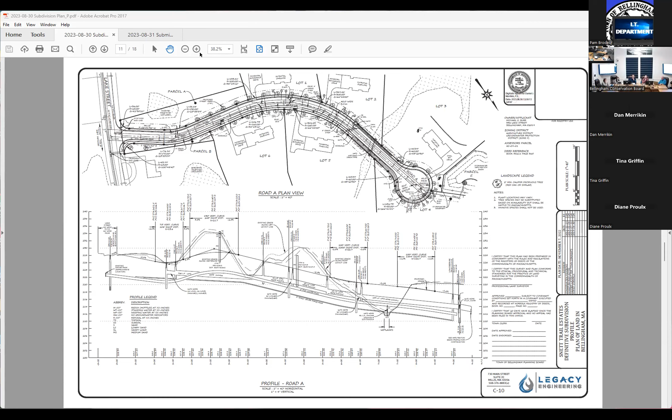The commission asked that at the crossing, we replace the two 18-inch pipes that we have with a single 24-inch pipe, and we have done that here. What you're seeing is the inlet elevation and the outlet elevation, but it is one single 24-inch pipe in that profile cross section there.

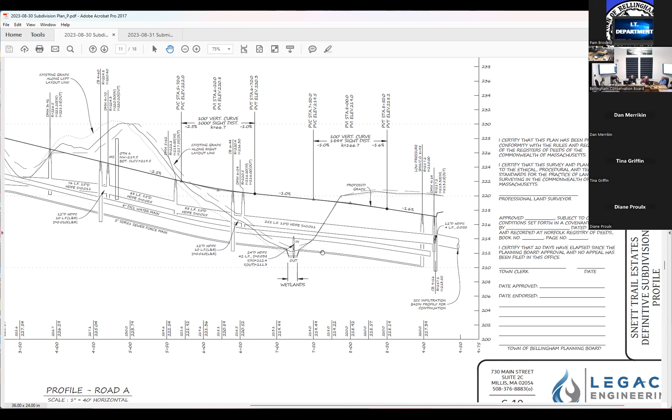The second change that was made is we had asked the planning board if they would consider waiving the requirement for a sidewalk, and they said no. So, within the road footprint that we already had, we have added a sidewalk, and it's on the bottom side of the plan that you see here.

No. Length of the road? Is it white concrete, or is it going to be asphalt? It's asphalt paved. And those are the only two plan changes.

BSC review, and I know Matt's here, but we did do a site walk. We went out and looked at the crossing, and the plans really haven't changed with respect to the proposed replication area, and I know you have a memo. Give the members a chance to review some of this information - some we've gotten on the web page that Hannah set up for us is really new, and some is a little older.

Just want to make sure everybody has had a chance to review Matt's brief, to the point summary. Are these drawings the ones I have? No, I don't think I have these revised ones. Dan, did you provide these already electronically?

Okay, I'm going to check. Was that recently submitted? I submitted these three weeks ago. The review is the last document. I can tell you when - yeah, three weeks ago, I should have them.

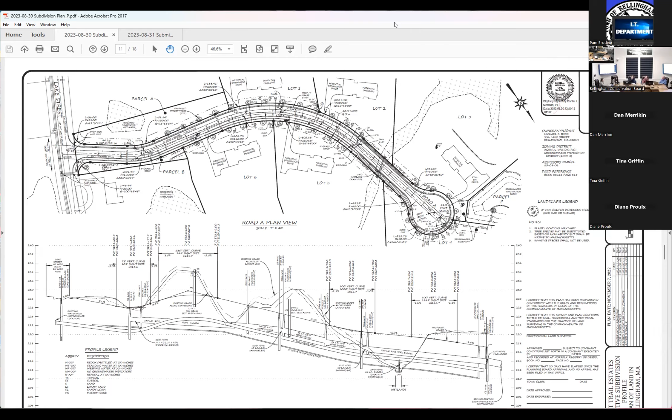All right, well, if no one has any additional questions, I think we can move to accept a motion to close the hearing and issue - do we have any other conditions? Do we have an order of conditions already back for this? I don't think anyone's prepared an order for this. I thought we had talked about doing one, but maybe I'm thinking of another project. There were multiple orders of conditions that were in different steps.

So we'll need to accept a motion to close the hearing and issue an order of conditions with acceptance of the project for 0 Railroad Street to Snett Trail. So moved. Second. Thank you, Steve, Danielle. All right, any other discussion?

Anna, just because I'm coming in at the end of this project, is there any special things you would want in the special order of conditions?

Well, given you're working with the stream bed, what do you think? Is there anything we've said in the past? It's been a while since somebody did something with a culvert in a stream bed, but obviously we're going to want to see sediment erosion control. Notify us when it's installed so we can inspect it prior to commencement of construction in that area.

It's such a low flow area. The last time we walked it, unless it suddenly flooded with all this rain and got a lot higher. The only other thing is when doing road work over an area like that, sometimes they have to do dewatering when putting in the base and digging out the bottom. They shouldn't have to encounter any of that, there's no groundwater. I'm just thinking of keeping the sediment from going downstream. There's almost no stream, plus the erosion control probably handles it.

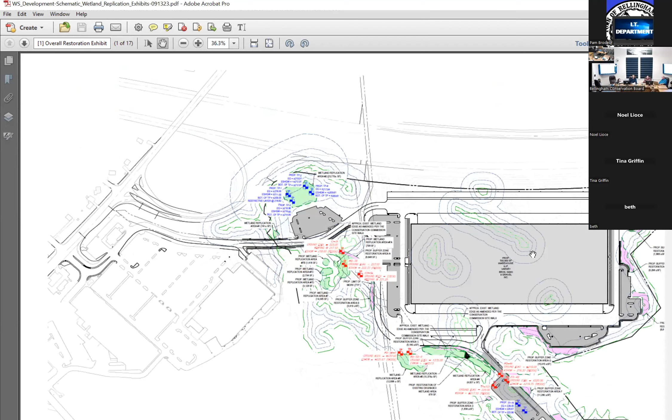All right, so this plan here - just an overview, though I have detailed views - the areas highlighted in bright green represent the areas we're proposing for direct mitigation of wetlands, so those are areas that will become wetland. The areas in pink represent the current buffer restoration program. Now, some of these areas, if you go into the Wayback Machine, we had discussed some sidewalks that may not, in the commission's view, be best for that buffer mitigation. So this isn't reflective of any changes we made.

The first thing we wanted to do, working with Matt and the commission, is get some level of concurrence that the general locations and shapes of the wetland mitigation made sense. Those are going to be informative to how some of that buffer restoration might work too. So we haven't tinkered too much yet with the buffer stuff - that's going to come next, but it's going to be heavily influenced by how the mitigation comes together. So we thought that made the first next step.

Generally speaking, in the upper left corner you'll see that green polygon with the 4 blue dots on it - those are test pits that we completed in the field. That was the area we saw on one of our site walks that looked, the soils were kind of gleyed, they were a little bit gray, and it looked like it had some seasonal hydrology. When we did some hand augering, we noticed there was a restrictive layer that may have been 15 or 18 inches down. The test pits we did out there confirmed that around that boundary, there was a restrictive layer.

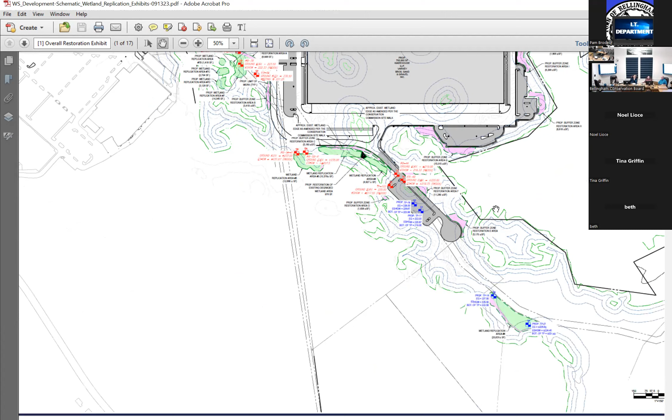Is it laggy? It was a little bit, it looks like it might be frozen. There it goes. Okay, little suspense there.

So this area, what we tried to do is outline it for two things. One, the area that we found to be restrictive. Two, in the areas you can kind of see the contours, these bunched up contours here are those ridges and rock piles that are kind of artificially there.

So the idea is remove those rock piles, level that area out, and kind of place that in elevation. We're gonna work with Matt, Brian, to create topography in there, use that restrictive layer, and then use some of the engineered materials that we're gonna introduce to make it a wetland. We really feel good about its potential to be a functioning wetland system.

Some of the hydrology will be influenced by the stormwater systems that we have that are contributing here, that are really designed to kind of mimic how the hydrology has been functioning in this area as well. So in terms of its sustainability, we feel pretty good about it.

That's the one area that's fairly new. We had talked about it at a high level maybe a month or so ago. The next step for us, provided the commission felt it appropriate to advance into what we're calling more of a schematic design for this...

...and have Matt continue to oversee that, would be to grade this out and really put some engineering, or some more engineering, behind it, so that Matt can really kind of get into the mechanics of it and start exploring how we want to construct that.

What happens if that doesn't work? Good question, I think we can talk about some contingencies. Maybe it'd be better if we build it out a little bit and then circle back to that. And define 'doesn't work' - by doesn't hold water, yeah.

So one of our targets here is to create vernal pool habitat, so that's a very identifiable target. With the perched groundwater wetland system replication area, you can spec out more facultative species that occur in wetlands primarily, but also can survive drier type conditions. We're gonna dial that in a little bit more and give more specifics. But I'm confident we can create ponded areas, at least seasonal.

And we're gonna have our standard 3-year bonded monitoring period and programs going forward, just to make sure that the survivability is tracked and have metrics that we can hit along, as we normally do. And obviously, if we're not hitting those metrics, we need to come back to you and discuss how to resolve that - whether that's a simple tweak to the area, or something more substantive. I feel confident with the proper oversight and creation of these areas, they should function.

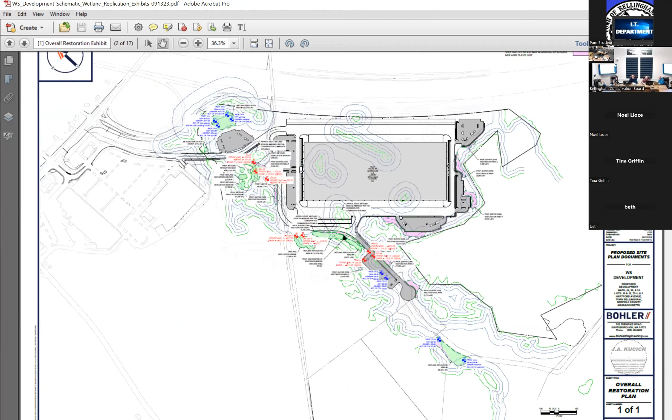So I will say I'm looking at a plan that you're not showing on the screen right now, the overall restoration plan. Probably the page first plan shown in the 627 packet that you provided. Do you have that, Austin? And it would be really helpful for me on this plan to have these buffer zones labeled or called out.

Austin, you had a plan — I'm sorry, same. Relative locations on it, but it doesn't call out what all the other lines are. I can also go to another plan and see, but there's also some labels that kind of block out some imagery, so yeah, we realize it.

For our records, the wetland planting area and buffer zone planting area symbols should match what's depicted — so color them green, basically. There's one that's hatched, like dash lines. Ah, okay, yeah, we'll clean that up.

So that was part of the original submittal, and we haven't changed that plan yet because we want to make sure there's a consensus here. That plan will be updated, and admittedly the hatch, from a graphic standpoint, kind of makes your head hurt.

Totally agree with you. Yeah, and I think part of the different colored areas you're looking at were early estimations of replication area, buffer zone area. I think what the micro topography will do is allow us to fine tune those numbers and come back to you with a color coded plan and topography that supports it, for the commission's consideration and Matt's input.

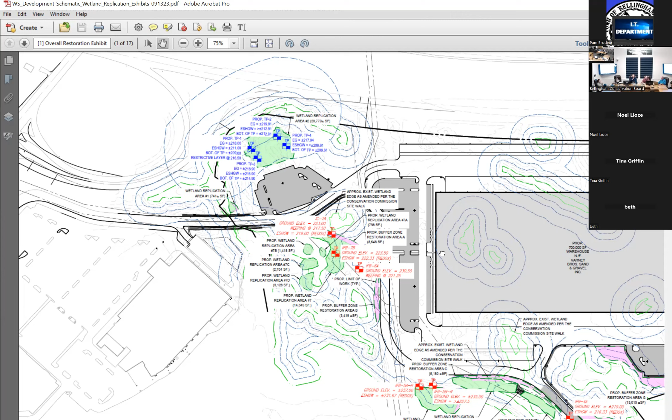One of the questions I have - I know enough to know when I don't know something. I don't know if there's, as Jeff phrased it, a better place that Matt would say on the overall site. If you had anywhere to choose on the site map, as a commissioner I'd rather know: is there a better spot for wetlands replication than what they're proposing? And if so, is the reason important or valuable enough for us to say don't proceed in this location because we think there's another spot? I know they're proposing this and you'd work with them to tweak that area, but have you had a chance, Matt, to look at the overall site and say the whole site makes the most sense for that size replication, or that replication with vernal pools of X square footage, from an environmental point of view - ignoring for a moment the huge building and parking areas nearby. Does that make sense? I don't know enough about the rest of the site to know that.

One thing I was going to ask Austin - if we ever had the paper plans, I'd actually start circling with your assistance at some meeting the areas we've discussed for this versus that, because I know it's a moving target, but we've covered this in previous commission meetings and I don't want to re-investigate as if it were the first time when it's not. We've already covered this area, discussed this delineation is good for this area, this one's still questionable, we weren't sure. We did some soils recently - one of the last things was going out with Brian, I think it was you, wasn't it? I thought I saw something in the notes from Matt, or maybe it was with Matt - they delineated by the cul-de-sac to determine. So I don't have a good sense of where we are with some of those areas.

Before I make a decision like, yeah, you guys should invest more time, effort, engineering and money into tweaking this and another planning meeting, I'd like to step back a bit and say, does that make the best site? I don't know enough to know if it's the best spot on the overall site. So that's how I tried to approach looking at the materials provided to the commission in advance of Monday's meeting - this plan and the subsequent sheets with the soil boring data and zoomed in images of each of those green and pink areas.

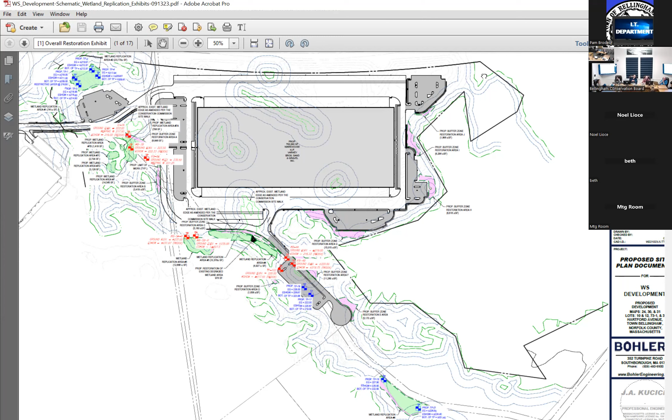We selected this area for the perched groundwater replication area because we identified some perched condition out in the field. The topography is undulating, the vegetative cover is somewhat sparse in this area. It's been historically manipulated, maybe not a ton of wildlife habitat value currently. But also there's going to be hydrology discharge from subsurface infiltration basins, creating a source of water. With all those factors combined, we felt this would be an appropriate location.

Whereas the other ones, again, are just tapping into groundwater, minimal excavation effort. You'll recall this was originally, there was some wetland replication proposed up immediately adjacent to vernal pools up in this neighborhood, in the planting legend. And that was one of the things we talked about, not impacting what little available non-breeding upland habitat there is.

That we were going to kind of destroy the upland to create a little more vernal pool habitat, which pushing away from that was smart. And because this is a weird area, you walk into it and it's like something's weird here. It's like you've got water staining, but there's no plants, or whether there's a tree canopy, like a higher canopy. Yeah, it's a very odd setting.

Hence it needs some creation, some assistance to get it to that point.

Roughly, I know Matt did not focus on square footage, but about how many square feet is that green area? Just to give you a perspective, the drawings have some calculations on them. That's about 23,000 square feet. Half an acre.

Why the need to deepen it? Is that to accommodate the stormwater runoff feeding into it? Not necessarily. It's basically to create more of a bowl depression, a collection area for surface runoff, so it pools in a specific area. And you need a certain amount of depth. If you're going to create a vernal pool, you need a certain amount of depth to be able to hold water for the length of time necessary.

Exactly. So being all this deep for primary collection, if it's all this shallow it's going to dry up. You need some depth in places to foster that vernal pool habitat. And it's not that deep currently. No, right now there's a lot of undulation going on.

Just to put this on the table, that's going to be an interesting one to get right. Yep. If we're going to have a vernal pool hydrology that's in a perched system, you're going to rely heavily on evaporation and transpiration. Can someone expand on perched system, please?

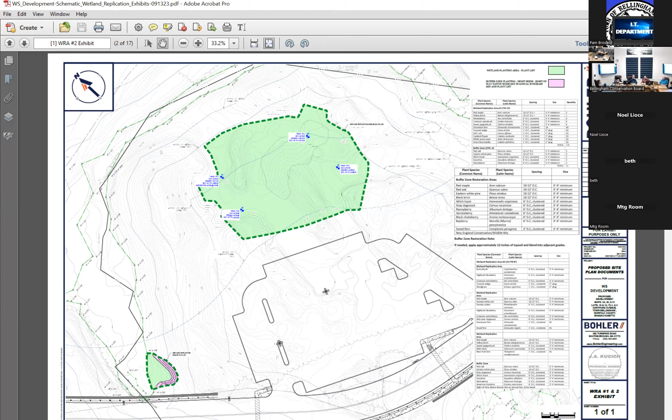Steve, two simple questions, maybe three. First, Matt, is there any other place you would rather see before they invest any more energy in this place? To get to that 2-to-1, we're pretty constrained given the site configuration and proposed structure, so there's not a lot of option.

So the short answer is no, there is no other better place. The second question is, Jeff, I want to pick up on a previous conversation from our first working meeting and give you an opportunity to expand. A brief comment, maybe in passing, you kind of had it in your head that the 2-to-1 ratio was a little less than that in some previous meetings or presentations, and you had a sense that maybe that was okay or might continue forward.

I'm trying to remember something, coming into the middle. I think I can put some color, maybe Brian can. I want you to have an opportunity, if that's how you feel, to expand on it before we invest any more time.

How I feel is we've got to make the commission happy with the proposal, but the point I was making to you before was our original submission, our NOI filing a year ago, did propose 1.67 or 1.69 to 1, and went on to explain why there were other opportunities to approach the 2-to-1. But those upland areas were forested upland that we didn't feel there was a benefit to disturbing in favor of creating the wetland. So what we had proposed in the original submission was something less than 2-to-1. We believe the bylaw allows the commission this discretion, and we presented an argument in our filing as to why.

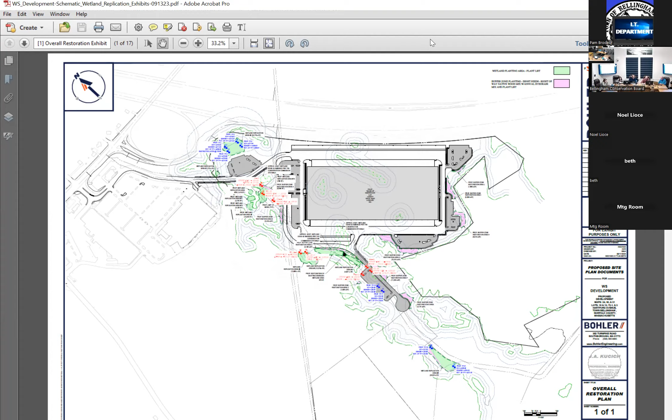So we'll move to continue this hearing for 217 Hartford Ave to the evening of October 25th, time to be determined. You'll be notified well in advance about that, but we're just setting the date for now, 10/25. And I have a motion, second, discussion.

In the meantime, we are going to have a proposal generated from that, if you need to confer on the scope to make sure it's covered, but it should cover at least one more working meeting and any information he needs to review, time for information to review off site and prepare a memo for us as the commission, and then we'll meet again and see what happens as of October 25th.

Well, maybe give it some thought to site walks, more planning meetings, how do you guys want to deal with that? We keep pretty good records, Hannah's good with that, learning more and more as every day goes by, but she's done a great job so far, so we can keep track of that, but I don't want to keep going back every two meetings for more funding. We haven't had to do that in the past, even for the shop, but again, I was out of the loop with that part of it, it was dealt with by the administrator and the chair in the past, so what makes sense we'll do and what doesn't involve.